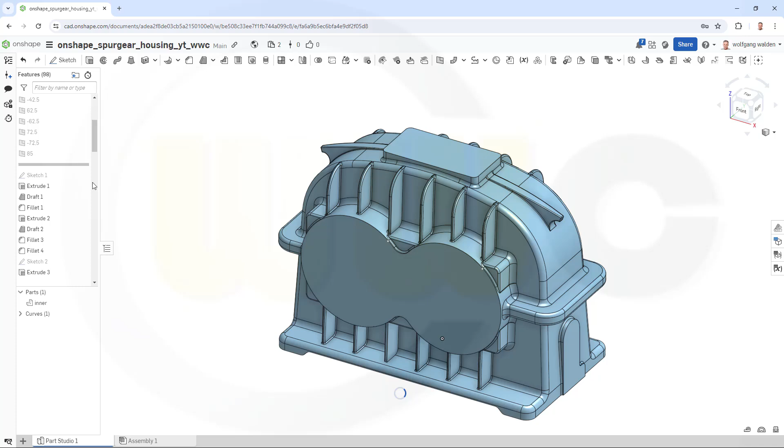First I want to create two more planes, so I will go up to that feature here, roll to here. It's not necessary but it's convenient, and I need to show all my planes.

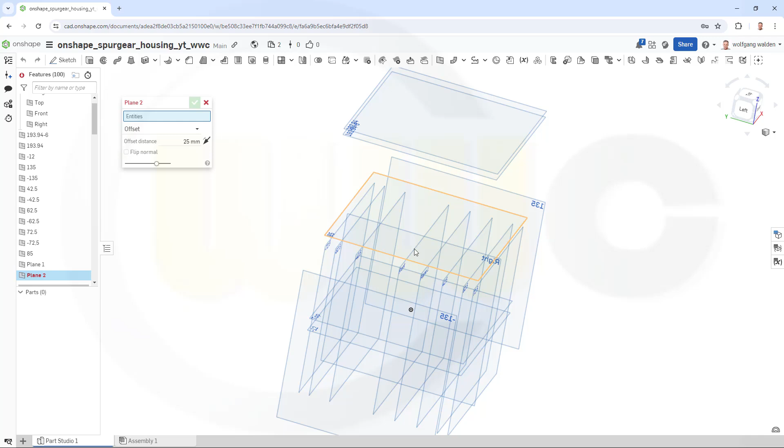I will need two more planes. Go for plane, with an offset to that's the front plane, like that, and it should be 21 millimeter, and another one again parallel to the front plane, it should be minus 21. That's not possible, so let's go for 21 and flip the direction like that, and okay.

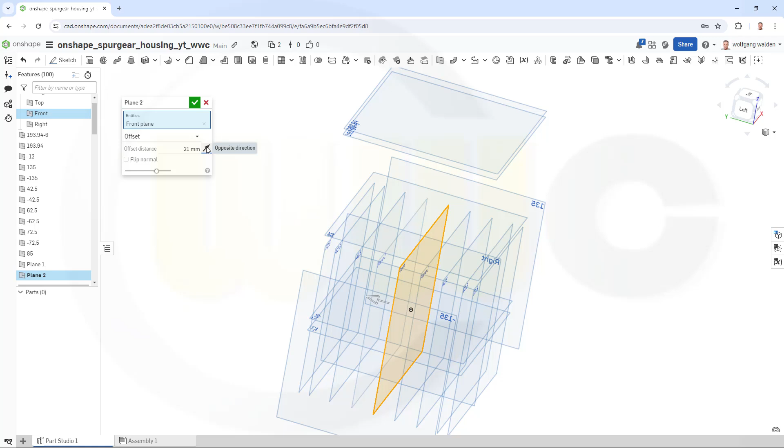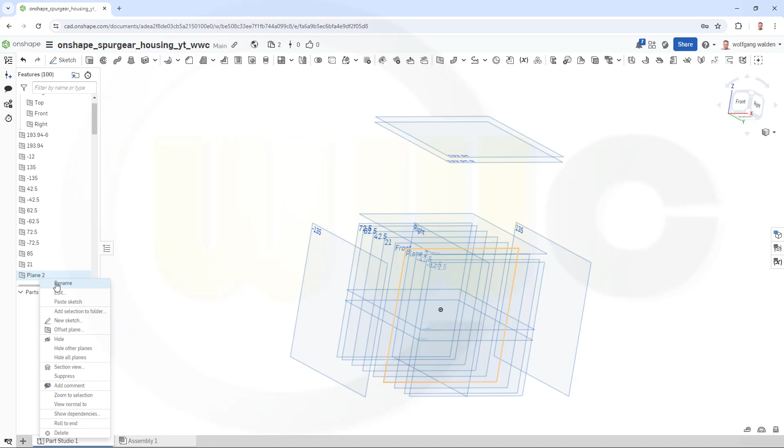Now let's rename these to 21 and minus 21.

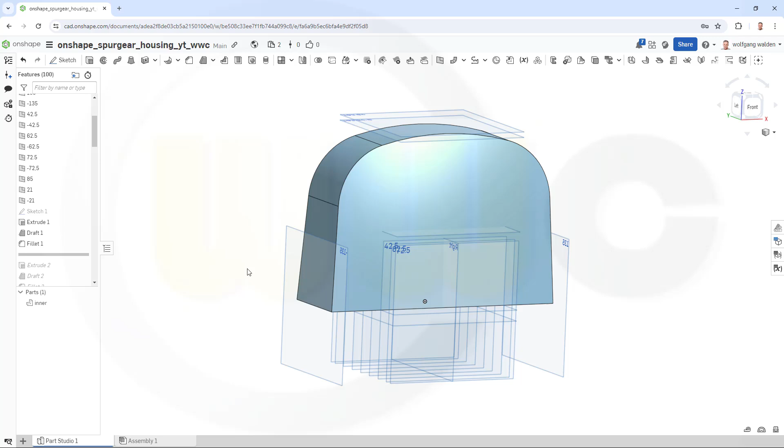I will roll to that fillet here because I need a copy of that part. Similar to the NX version, you can do sort of a timestamp if you copy it in place.

Let's go to transform, and I want to copy a part, and I want to copy it in place. Which one? This one. Confirm, which gives me an exact copy.

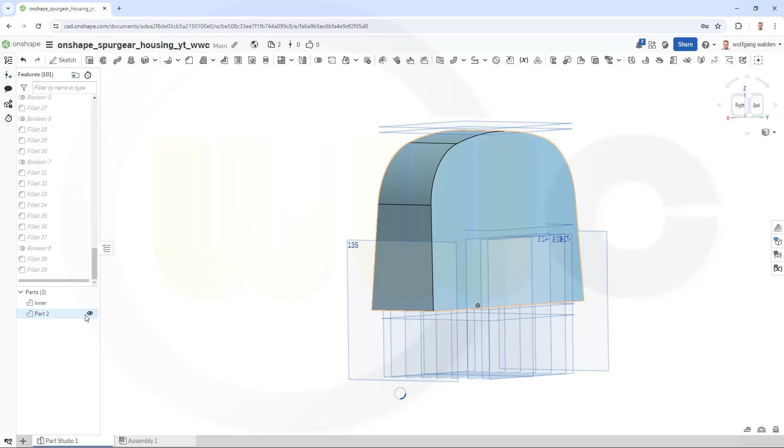But this is not associative to the later features, it's just associative to the body in this state. So let's roll to the end and see that's the original part, and that's the time-stamped copy of that body.

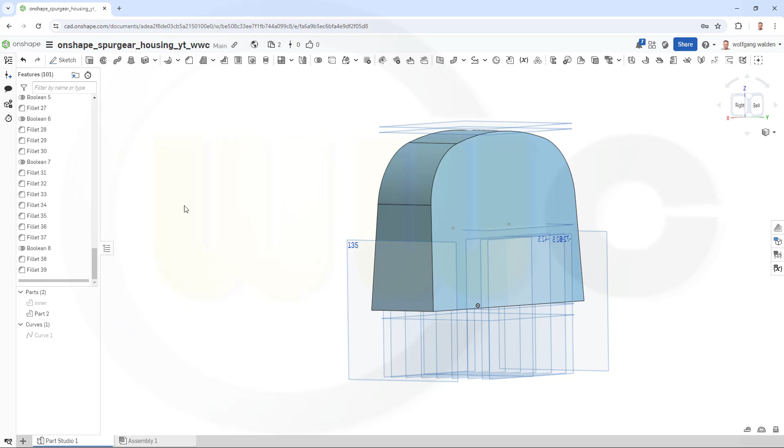Maybe hide those curves. So let's move on, hide all planes.

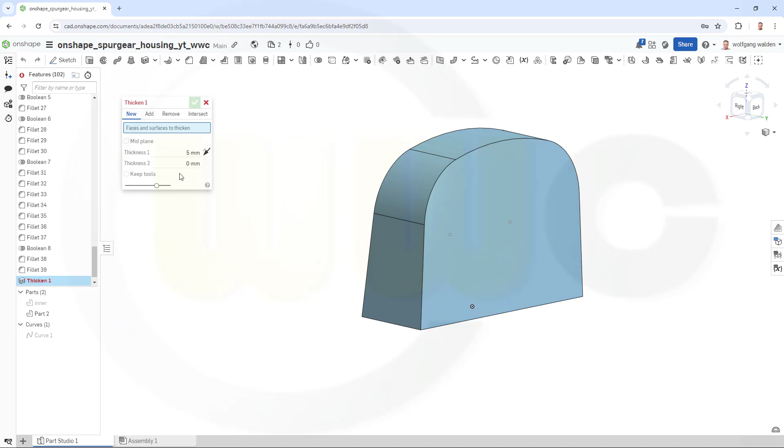I want to use thickness to make the inner body of that housing. So let's go to thickness, thicken, and I want to thicken it 6 millimeter on this side, and it should not be added but removed, so let's reverse that.

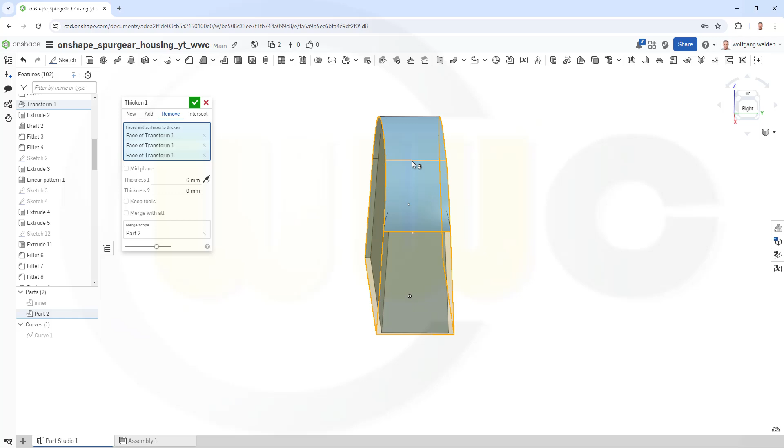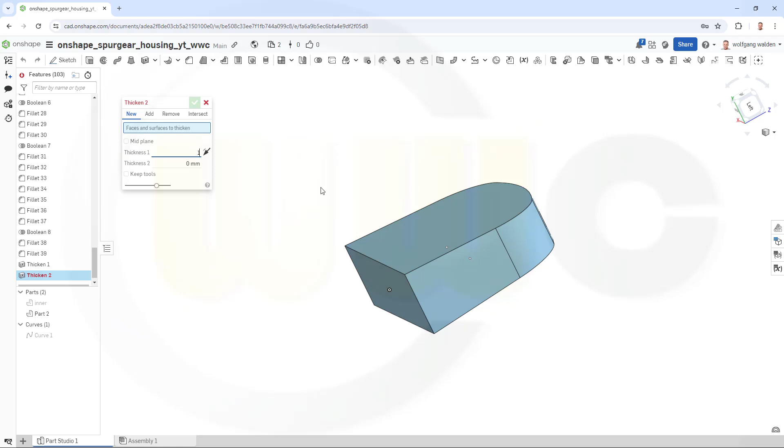It will be removed, same here, and on those here as well, and confirm. Then I have to do a thickness here on this face, so go for another thicken. This will be 1 millimeter right there, and again reverse the direction. Yeah, that's okay, and confirm.

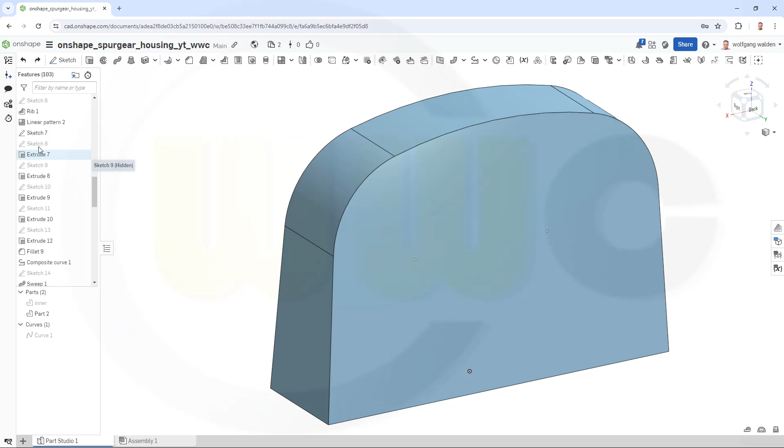Great, so I want to reuse some sketches, and maybe it's a good idea to show all sketches. Show all sketches and maybe hide the part.

I will need a copy of this sketch here, and that's sketch 11, so let's go and copy that sketch and paste it onto the top plane, that should do.

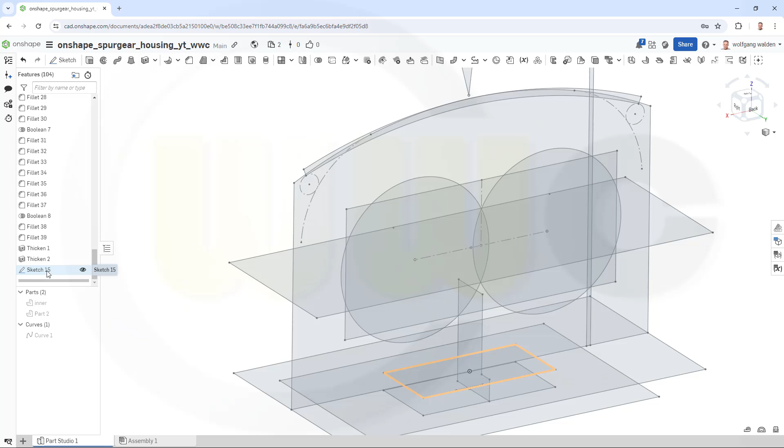This should be edited, so let's go there and edit it. Maybe look from above. This should be 80 millimeters and this should be 30 millimeters.

Sadly, those sketches stay not fully constrained, therefore I will have to align them once more. So where is it? Let's move it up a little bit, move it over here a little bit, and it needs to be symmetric somehow.

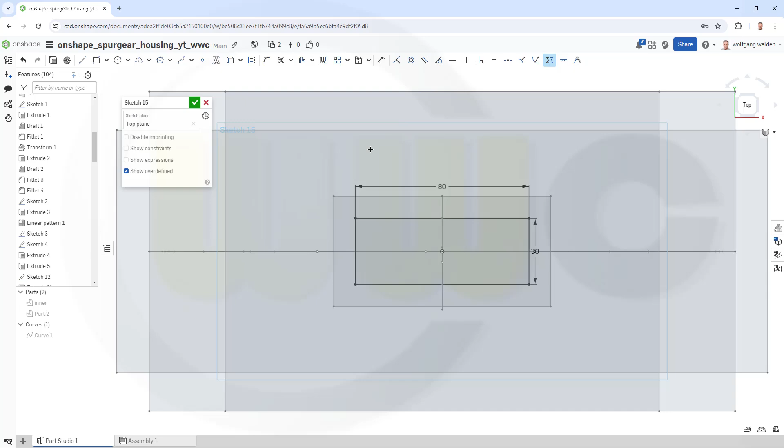So let's go for symmetry. This one and that one should be symmetric to that plane here in the middle, and these two should be symmetric to this one here. Okay, and I'll leave that sketch.

Now I can make an extrude which should go up to the top plane, to the uppermost plane. So let's show the planes, all of them. Yes, and so that sketch here, that last sketch,

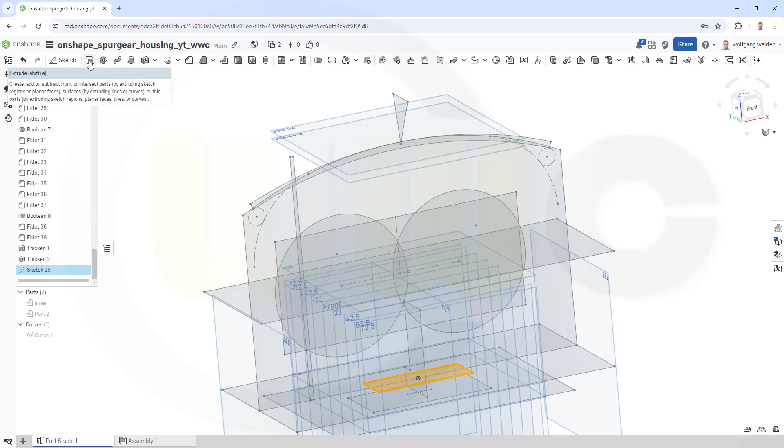should be extruded with an offset of 1 millimeter. Should be extruded up to this face here. Offset distance would be, no, let's go with a starting offset of 1 millimeter. Let's try 10 to make it visible in which direction. Yeah, that's the correct direction, so let's go for 1 millimeter.

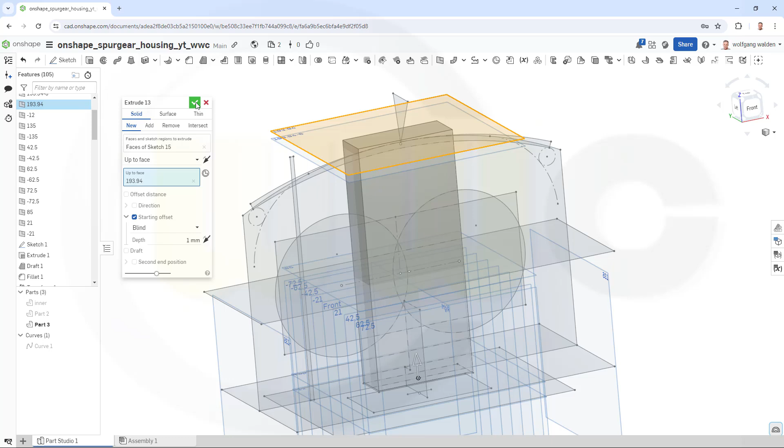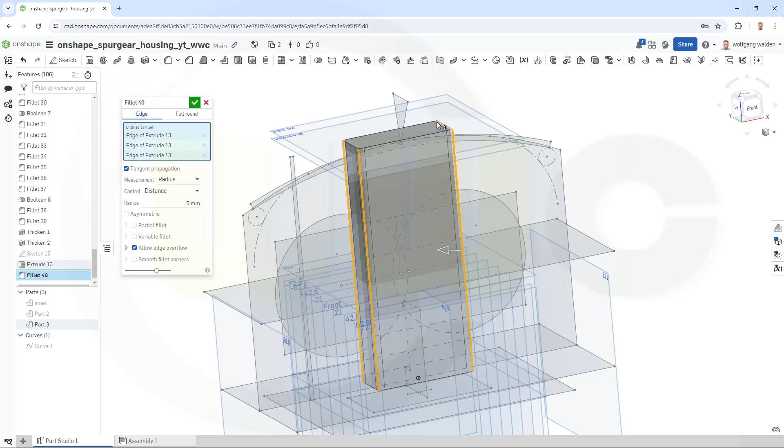Let's confirm this. Great, it's a new part, yes, and I want to use the fillet. I need 5 millimeter fillets on this edge, that edge, this one, and the one here behind, that one, and confirm. Great.

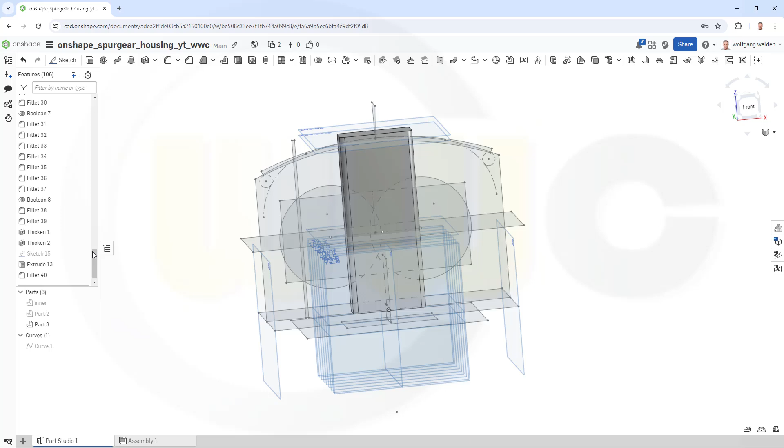Now if I copy these two sketches, nothing is constrained because they're not fully constrained, so I can draw them new. And I need that sketch with the 2 points.

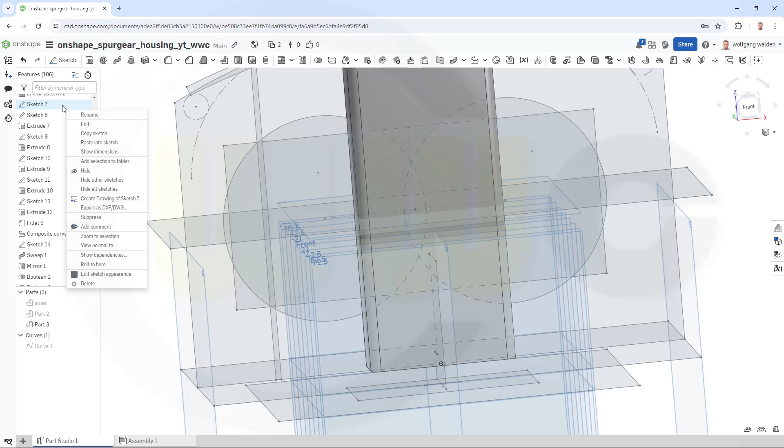So maybe that's sketch 7. Yes. So maybe hide all apart from sketch 7. Okay, and let's make a new sketch on the front plane.

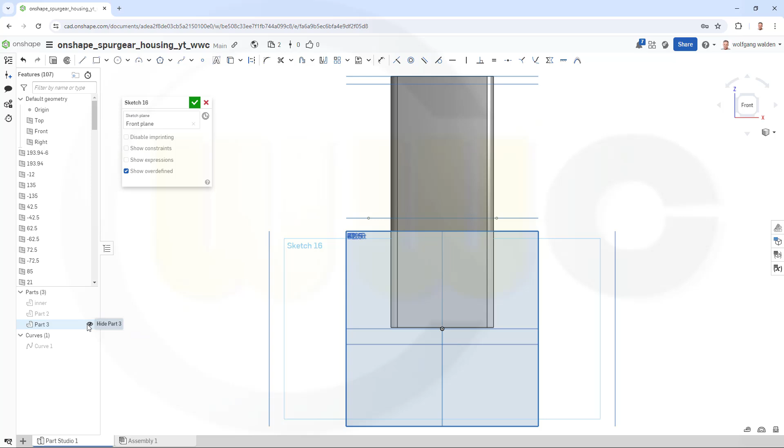On this one here. And okay, hide that part, and I need those 2 points, so bring them in. This point here and that point here. I need a circle, and therefore it might be good to see the part here.

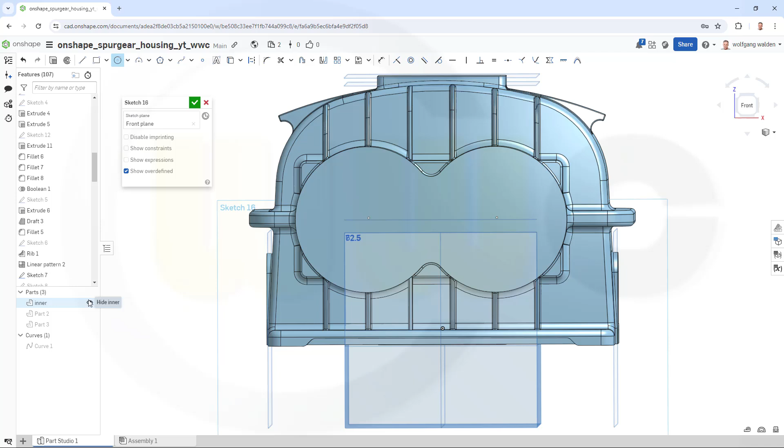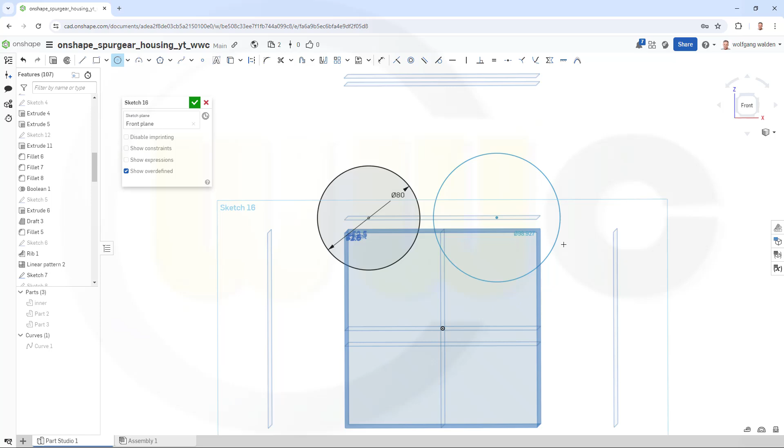Yes, so that circle here should be 80 millimeter, and the other one should be, let's do both of them in the same sketch, should be 85. Okay, and finish that sketch.

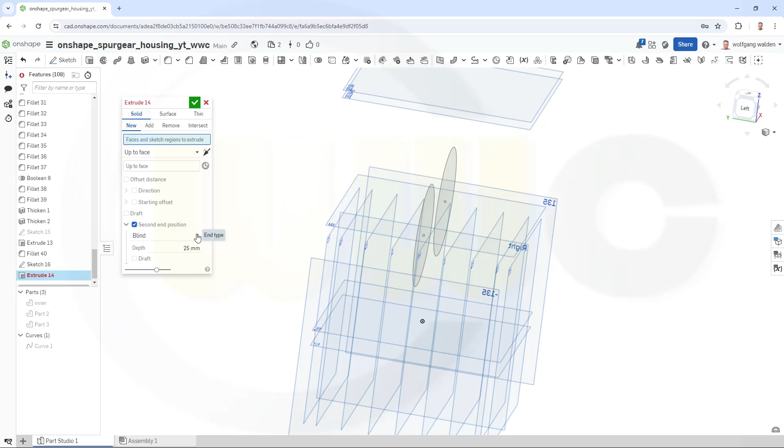Now those two could go up to that plane, because they will be removed anyway. So let's go for an extrude. It should be a new solid, yes. It should go up to a face, and the second end position should go up to a face as well.

So the sketch would be this one and that one. They should go up to this face here. First direction, and second direction would be this plane. And confirm.

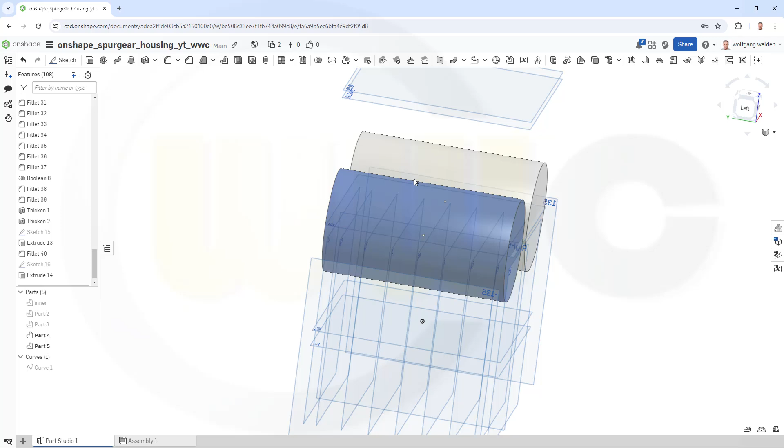Nice. Let's bring in that part, this one. And I need to cut from this part. So hide this one, that one, this one.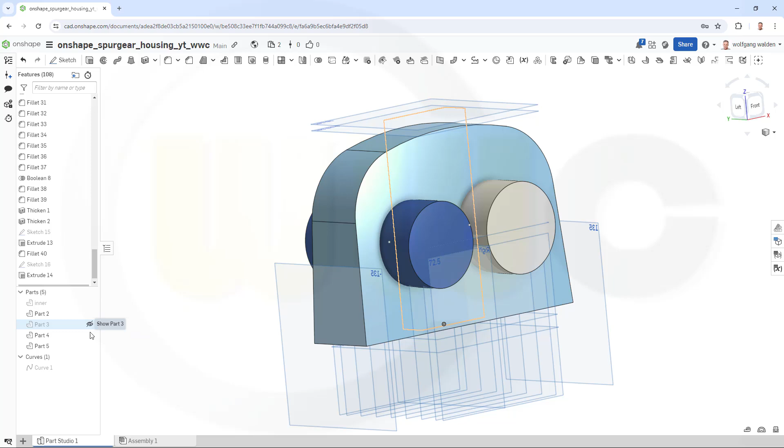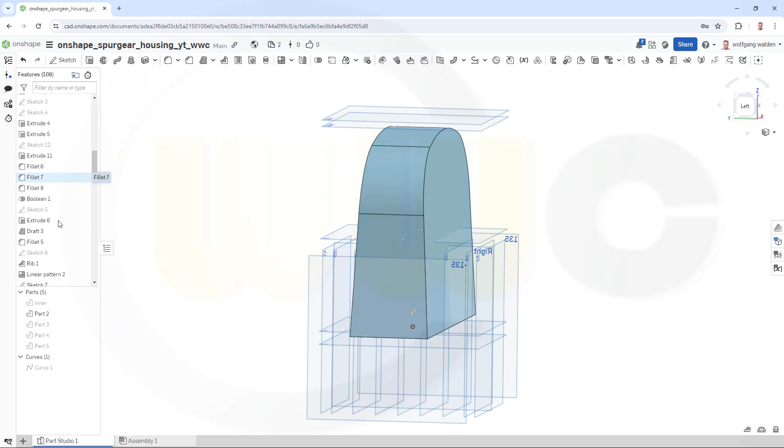And therefore I will reuse sketch 8 and 9. So let's make it visible. Sketch 8 and 9, sketch 3. Where is it? And there you go. This one and that one.

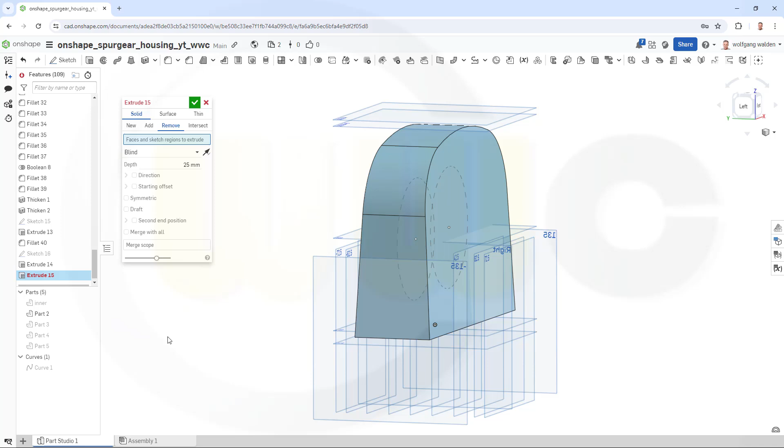And I want to go for a removal, and I want to remove, maybe switch to, no, it's not here, maybe just hide that for the moment.

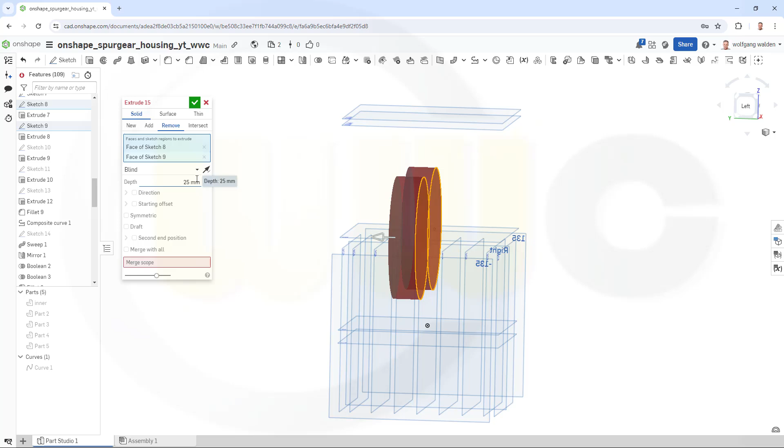I want to make an extrude and then another extrude, both of them at once, and they should go up to first direction, up to face, and that face would be

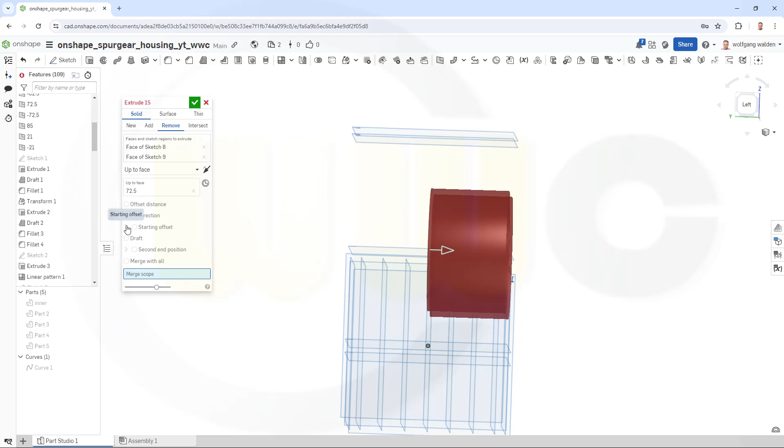maybe that face here, yes, and they should start at a plane, at an entity, and that would be the 21 plane.

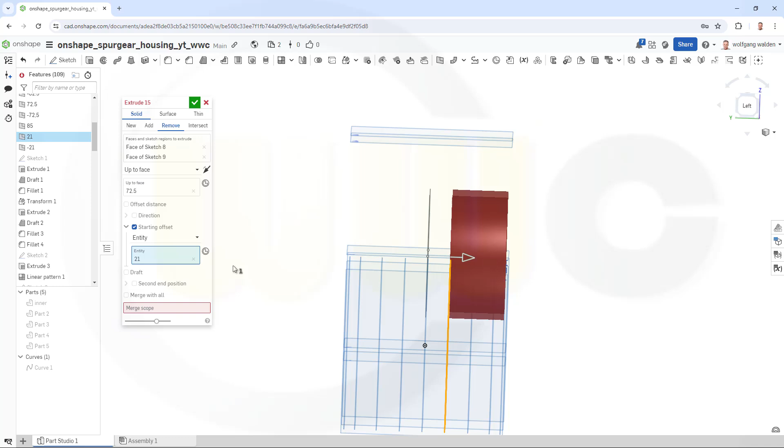Let's try to select it. That would be this one, yes, looks good, but this should be 21 minus 5. So, or no, that's okay, yeah that's okay. And the merge scope would be, of course, part 2, this one here. And confirm.

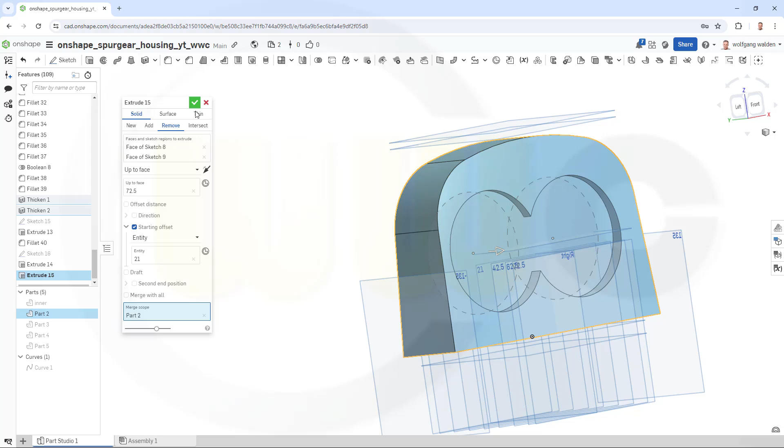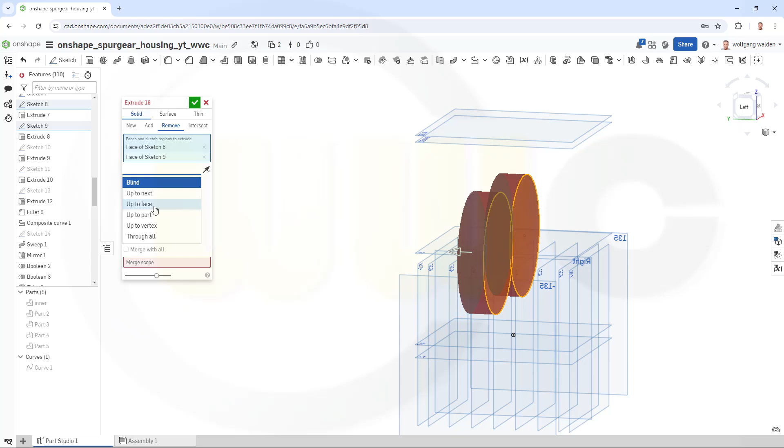Didn't work. Merge scope should be this one. Now it works. Okay, same on the other side. So let's reuse that sketch once more. So go for another extrude. It should be removed, this one and that one. It should go up to a face, in this case that face, and it should start with an offset, again with an entity.

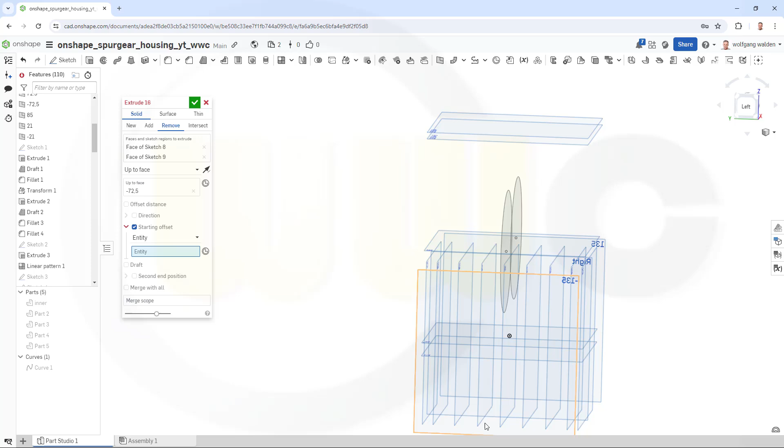And the entity in this case would be that plane here, the 21 minus plane. Let's try to select it, kind of hard, like that. And the merge scope would be again part 2, and confirm. Great, now I could hide the planes.

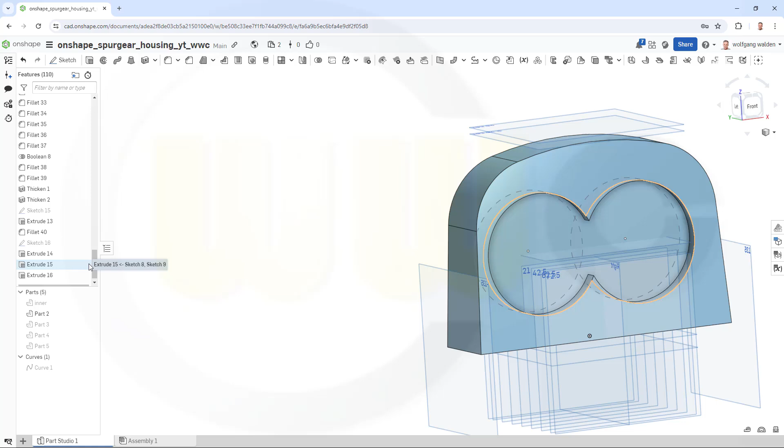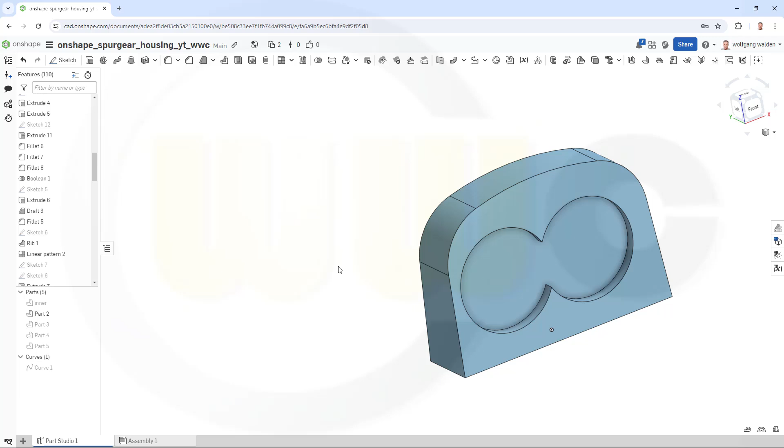All planes, so let's hide those sketches. Hide all of them. And I need 10 millimeter fillets on those 4 edges. This one, that one, and of course this one. Okay, great.

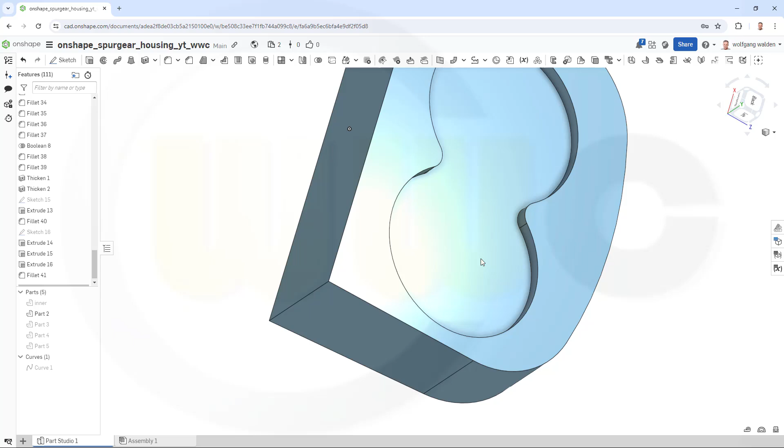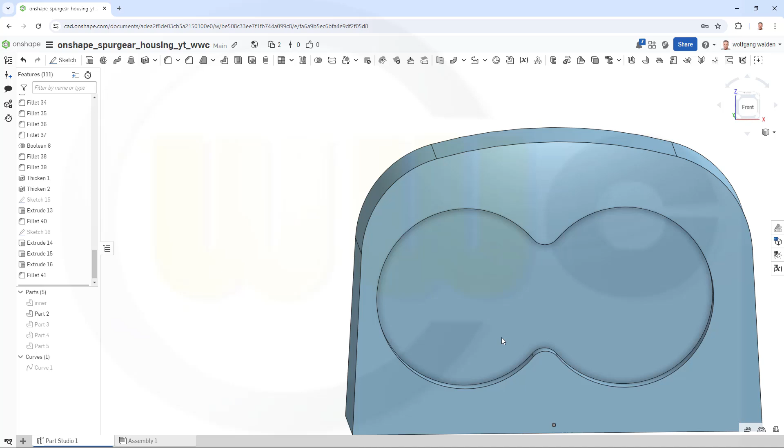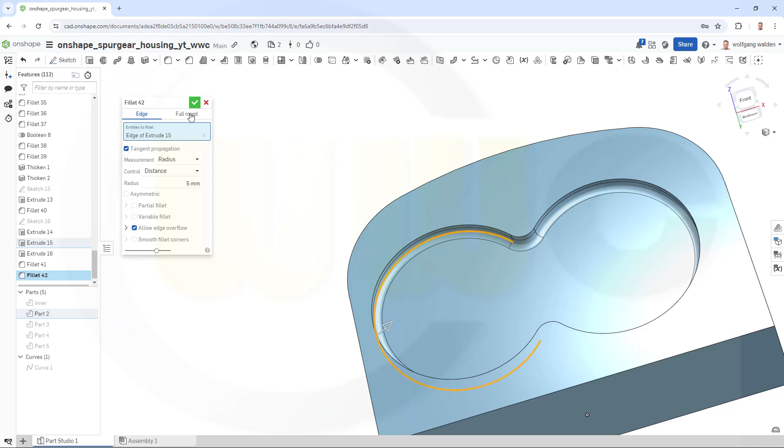And I have to simulate, as I did in Catia, the fillet, because the face fillet will not work here as I need it to work. So I will need sort of a hold line, and I will simulate that with a 5mm fillet along that edge here. And it should, yes it does, and confirm.

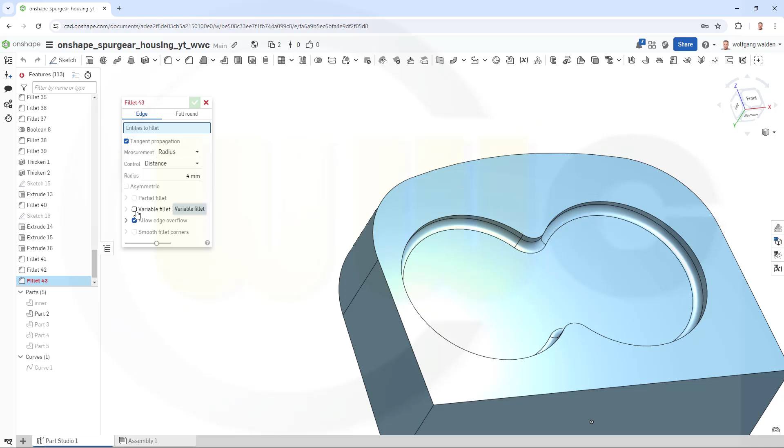Yeah, and I will use the same values on the other side. So I need it to do only on one side. Okay, so let's add a fillet with variable radius. Okay, let's go for 4mm all around.

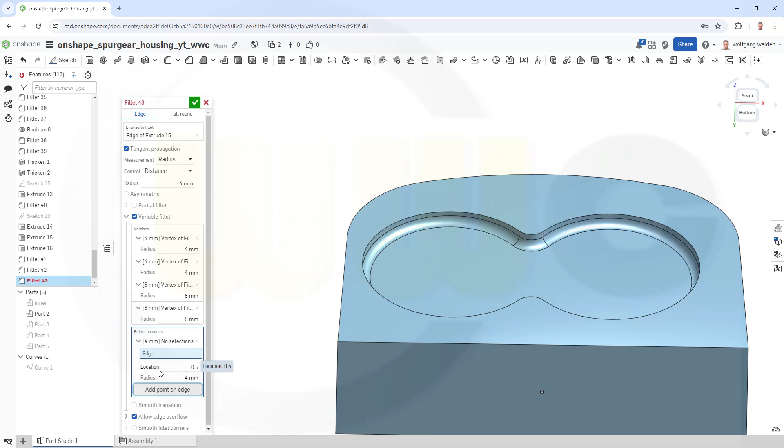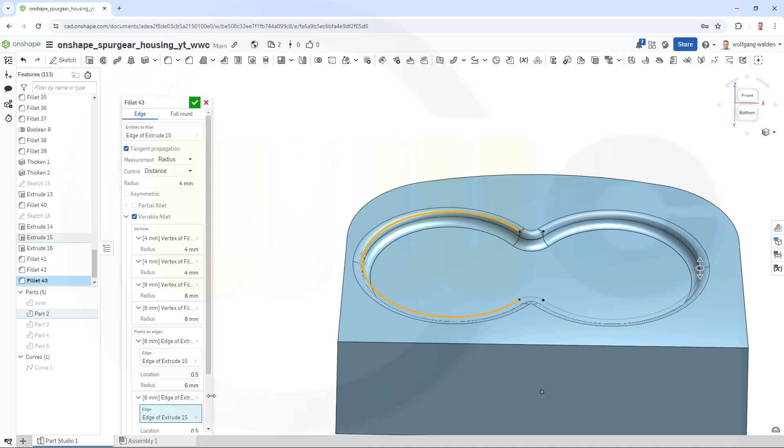Yes, and now I want to use the vertices. This one, that one, yeah, this one and that one, and the last two should be 8mm, and I need 2 more points on the edge, so let's go for location half of the edge length, and this might be 6mm, and add another point on the edge on this side again with 0.5, so it's half and 6mm, and let's confirm this.

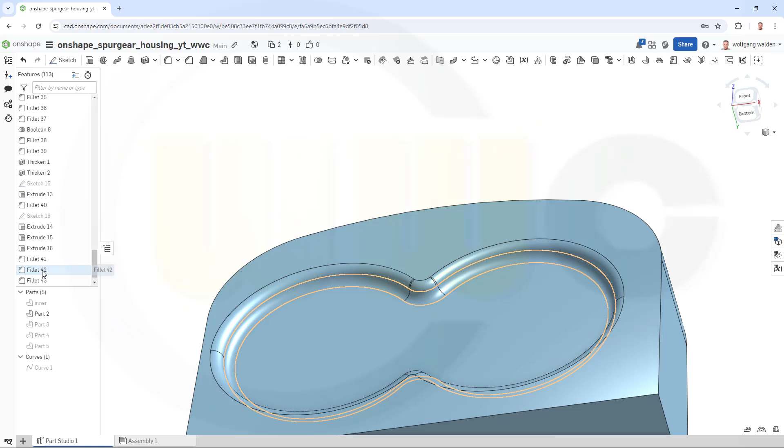So this looks already really good. You might have to add one more point here and over there. I will leave that up to you. So now I want to delete this one here, because I don't need it. It was just for reference. It was the fillet 42. Hopefully that will work. Yes, great.

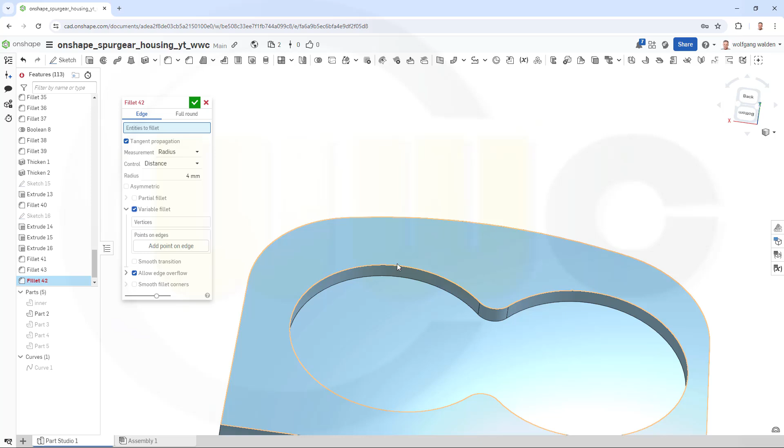Okay, now the same on the other side, same values. So let's go for another fillet with variable radius. Select this edge here all around. Add those vertices, this one, that one, this one. Those two should be 8mm.

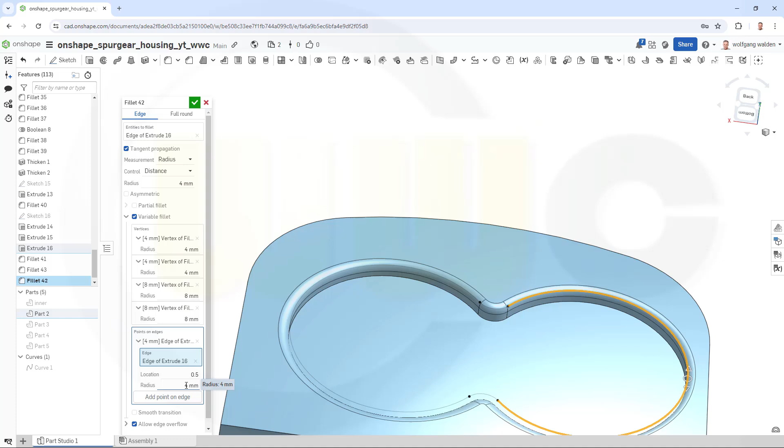Add point on the edge here with a 6mm radius, and on the other side as well. And let's confirm this. Great.

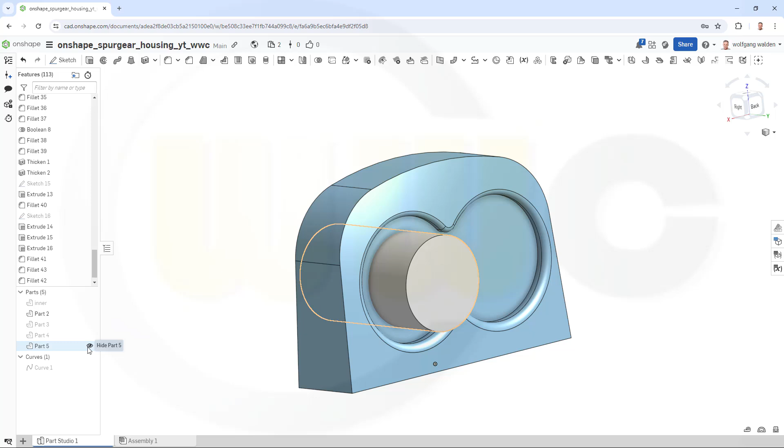Now let's bring back those other parts, this one, and this one, and that one. Now I could make a union of those. So go for, where is it? There you go. Boolean, let's make a union.

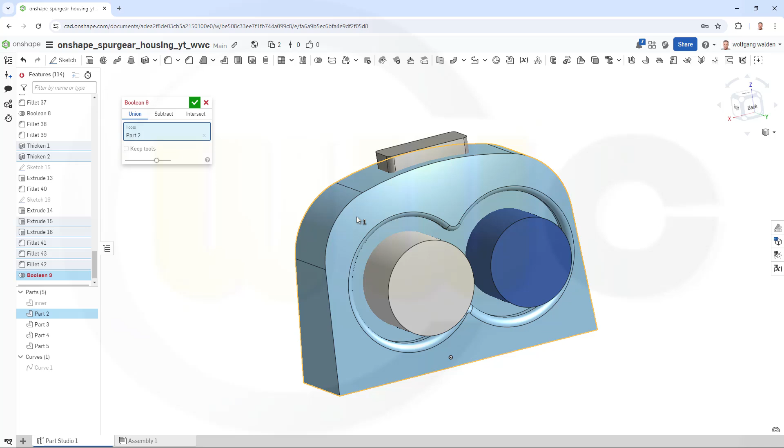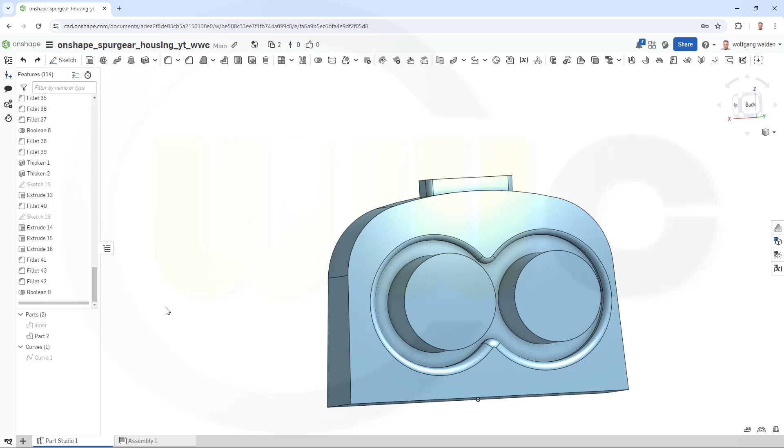This one, that one, this one, and that one. Confirm. I've missed this one, obviously. I thought I've selected it. Now it should be, yes. Okay, let's bring back that inner part.

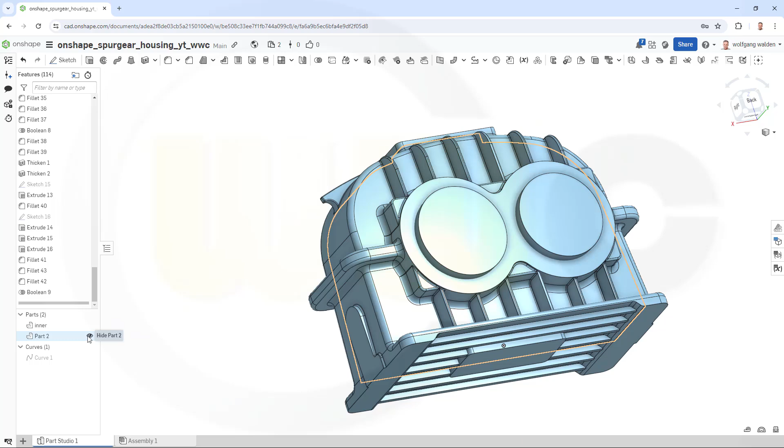And maybe I did one undo too much, because that should not be here. So that must happen before. Let's hide this, because that one is correct, but there is this one. So I think I have to change the order. The order should be changed. So this part should happen before I cut out this. Let's check it out.

So let's bring that bar up to this Boolean operation. Go to here and check those parts. That's this one, that's that one. Cooling, this is still here. That's extrude 10.

So that extrude 10 should happen after I've cut out this one here. So that's extrude 10, extrude 9, 8, 7. It's before the linear pattern, before the rib. That's this extrude here. So that extrude 10 should happen before this extrude, obviously.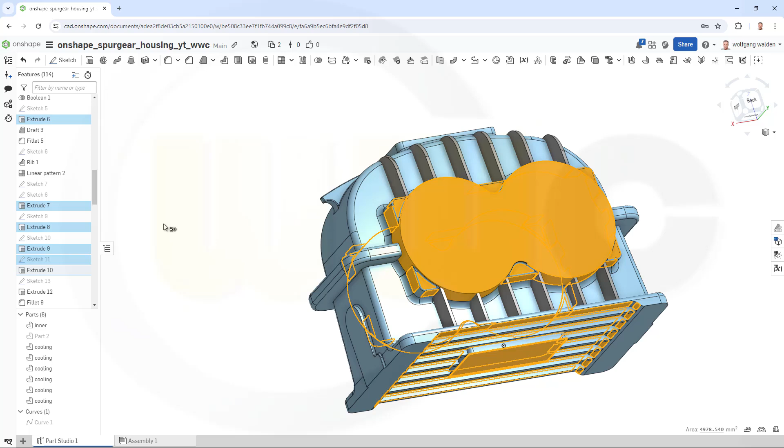So let's take it on the sketch and move it, this one and that one, or I could start that extrude from a different plane. That would be easier to do. So let's go to this extrude and let it start not from here but from a different point. So let's go to starting offset and choose a plane, an entity, and that would be of course the top plane, this one here.

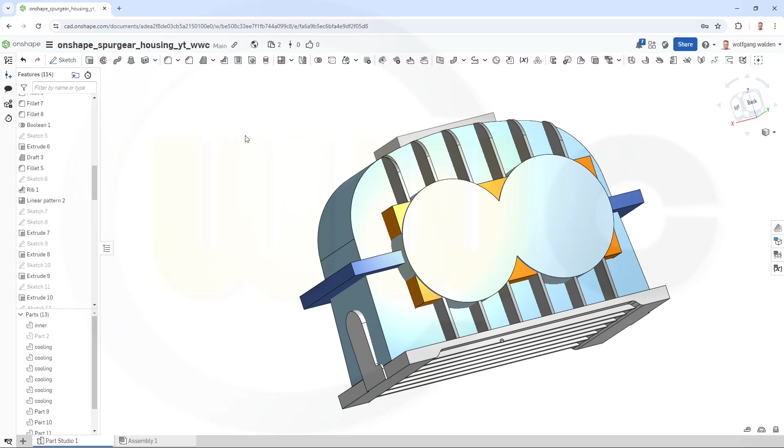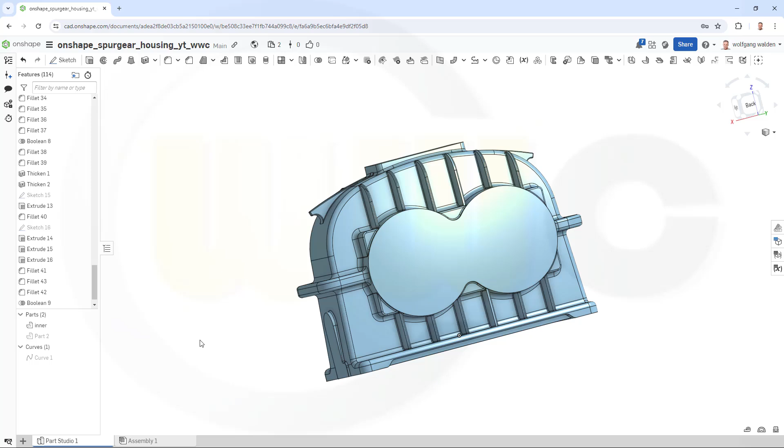That should fix that problem. Looks good. So let's roll this to the end, at least up to this one. Roll to end. Yes, this looks okay. Bring back that part. Yes, that's okay.

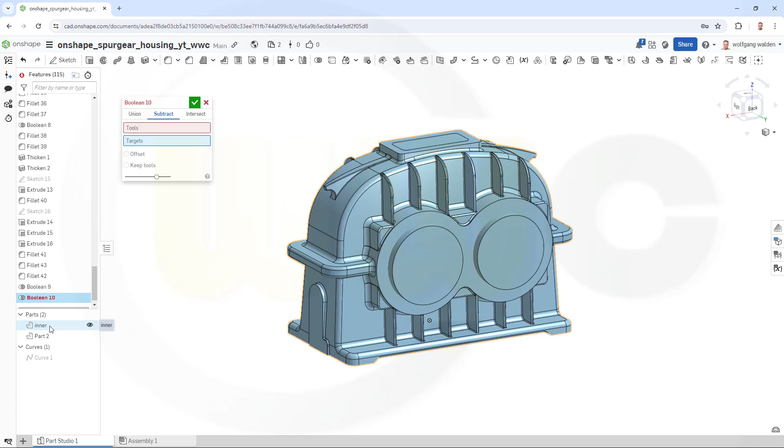And now subtract this part from that part. So go for Boolean, subtract. Target would be of course that part, and the tool will be this part. And I don't want to keep the tools, that's okay. Let's just confirm. So this looks really good.

What's left to do? All the holes, and I will leave those holes up to you because I think you can do those holes for yourself. And that's it for today.